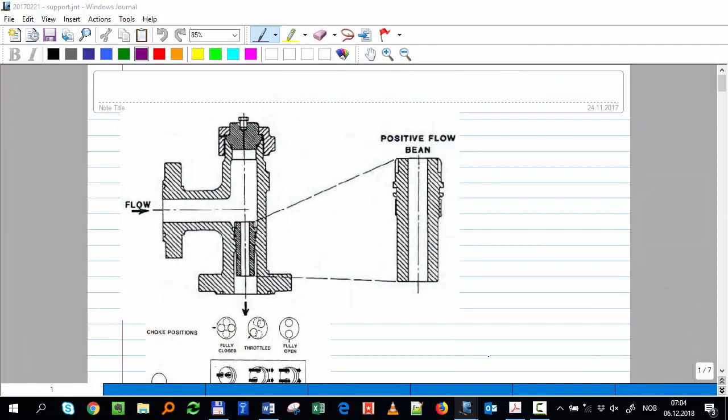Let me see, I think I have a few more. So that's a field in Russia. It's especially important for subsea systems, because there, like I said, it's very expensive to have one line separate for each well. So you commingle the production in one pipe and then that pipe goes to the surface. So that is a network - very typical for subsea systems.

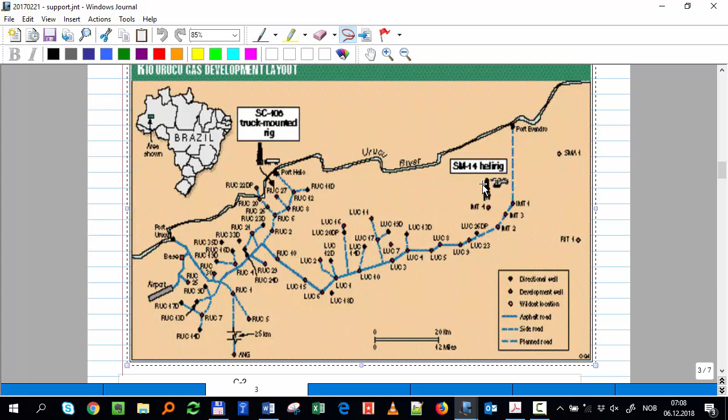Yeah, so let's see, I have one more - that's from a field in Brazil. And there the main thing is that there's some place, the export point, either here or here. And you have wells spread all over the Amazonas - they're drilled in the jungle actually. So these wells have flow lines again that transport the crude all the way to the port - I think this one. That's Urucu, another picture.

So it can be that in some cases we cannot use just a single well basis - we have to start looking at the whole system. How will the collection of wells perform? We know how to do it now for one well, or if we can assume all wells are identical, but we want to know how to do it when wells might be different.

So for that, I suggest we use a thinking experiment. We're going to use a system with just two wells. We have two wells that go to a common point, and then a long flow line that ends up on a separator. Let's call that well 1 and well 2. So to analyze that system, we're trying to use the tools we've learned before - this flow equilibrium concept. Flow equilibrium - what was the first step? You're having nightmares with the steps of flow equilibrium. You choose a point of interest. So in this case, I suggest we choose the point where everything comes together.

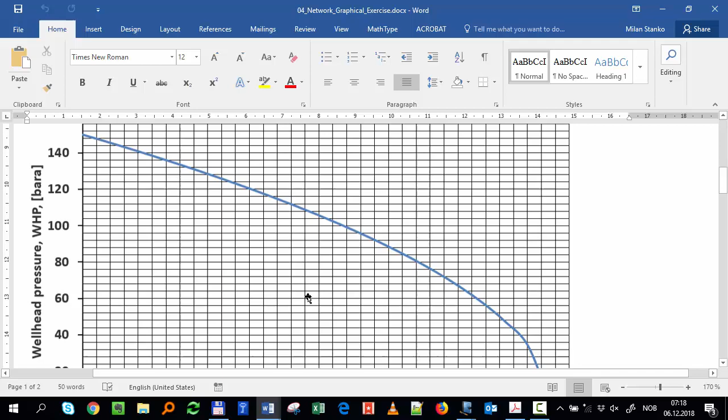Okay, so I gave it to you yesterday. It's called a network graphical exercise, and it's exactly similar to what we were doing before. You have two wells, a manifold, a pipeline, and a separator. The wellheads are very close, so I don't have any flow line here. The chokes are open, we don't care about the chokes. We got the curves for well 1, well 2, and the flow line. The task is to find equilibrium - if you put the system together, what is the equilibrium rate.

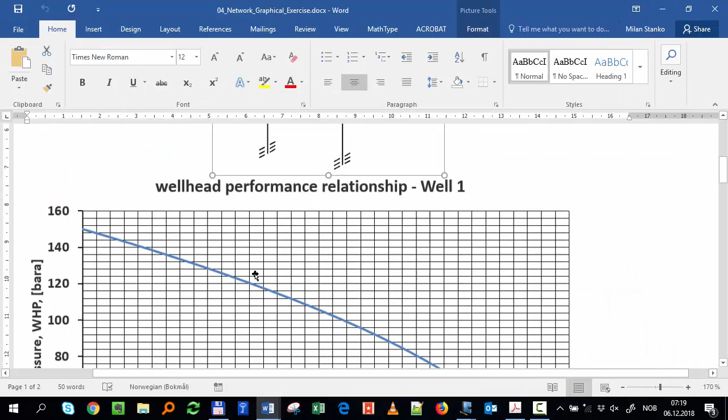So let's copy that, and you can do it on your own. I can show you how - I like to do it in PowerPoint. Let's see if you can do the same. So that is the system, and I suggest you copy this chart to PowerPoint. You can do it at the same time that I am.

So what was the first step to solve this problem? Assume pressure. What pressure do we assume? Any ideas? Let's take maybe 80, okay? Let's see if 80 is a good number.

So we go here to shapes, and we take a line, and we draw just a horizontal line on 80. I can maybe change the format, make it simply thicker, make it red first, and then make it thicker.

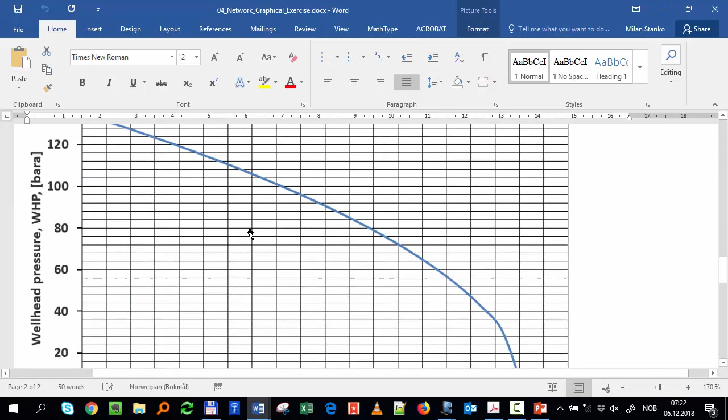Okay, now we go to the second well, then I make another PowerPoint. I want to keep the lines here. So let's go and copy this chart. Okay, I'm going to send it back.

And what pressure? The same pressure, right? The same 80 that I assumed before. So I have 80. Goes back, and then I go and knock it down. What will be the rate? I think here we go 1.1, 2, 3, 4, and 5. So it's 1.1, maybe 7. Okay, 1.17 million from that plot.

Okay, so here with PJ 80, then Q2 was 1.17 e to the 6 standard cubic meter per day. And then we go the last step. Let's call this iteration 1, okay? Because we know we have to make different iterations.

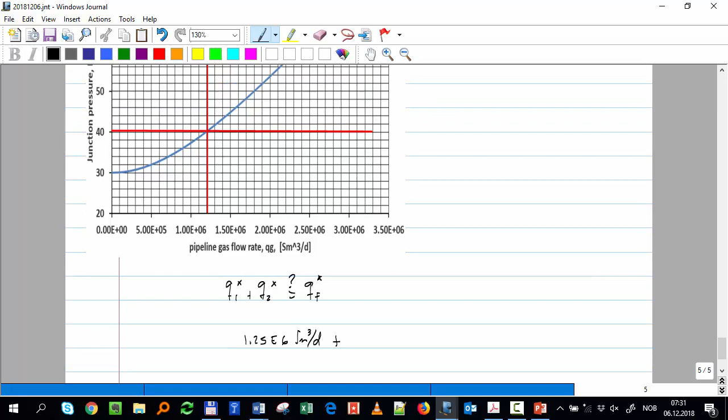Therefore, I go back and check, okay, how much was Q1 plus Q2, is it equal to QF? We have 1.25 e to the 6 plus the other number was 1.67 e to the 6. And we have on this side 1.2 e to the 6. How much is that? That doesn't work, right? We have now more on that side and less on that side.

Please note that the effect is the opposite. Here, if I lower pressure, I'm going to get more rate, okay? But on the curve of the pipeline, if I lower the pressure, I'm going to get less rate. And that's simply how it works. On this system, if I lower this pressure and make it lower and lower, the fluid can flow easily from the formation to that point. It's like lowering separator pressure. But on this system, if I lower the pressure at the inlet, then I can flow less, because I'm flowing against a constant pressure boundary.

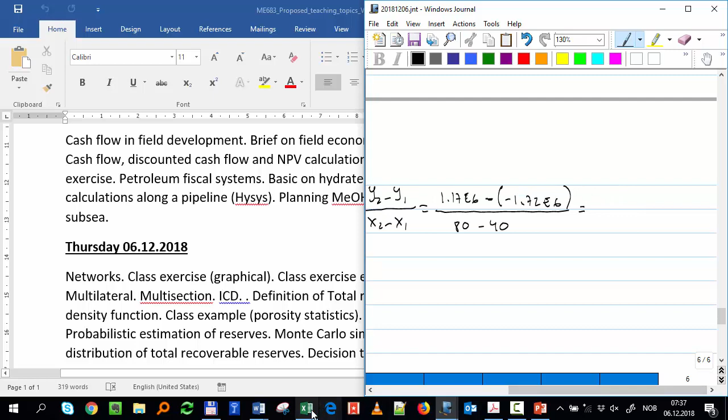You're letting me do all the work.

1.17 plus 1.72, right, divided by, we have to divide by 40. Okay, so we have 0.07225 e to the 6. Okay, that's the slope. But now we say that the slope of this new point should be the same.

If I make it from here to here, okay, I should have exactly the same slope. So I say m can also be, let's use y2, okay, y2 minus y, which will be this point here, divided by x2 minus x, that is 1.17 e to the 6 minus, what is the value of the error in this point? 0, okay? So simply we put 0, divided by x2 is 80 minus x that we don't know where it's going to be. That's the next point we're going to guess. And that will be equal to

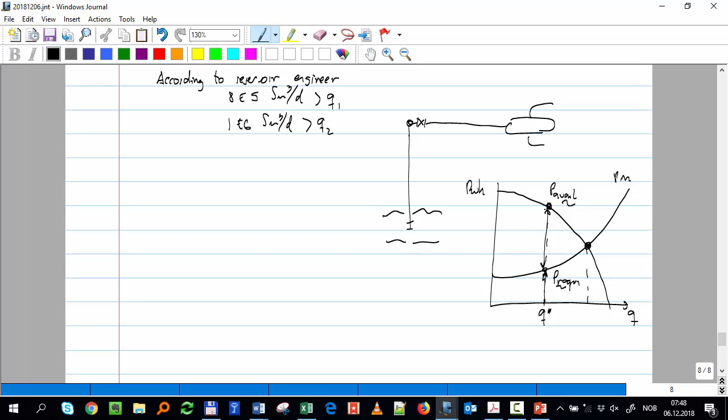But now the reservoir engineer told me I have to produce this value, this Q desired, for some reason. So what did we have to do there? We came into the available curve with that rate, we read the P available, and then we came with the Q to the required curve and read the P required. And then we say this one is greater than this one. Therefore, it is possible, and I have to put a choke in between to bring down the energy. That's what we have done, right?

So let's try to do the same here in this example. We have the curves, so we can try and calculate if the available is greater than the required. So let's go back to the rates he wants: 8 and 1 million. That's the rates the reservoir engineer wants.

So let's go back. 8 is here, for well 1. Let's extend it all the way up. That gives me a pressure of 96, I think that's 96. Or 84, 88, 92, 96. Okay, 96 bar. So let's say here P available, P wellhead. I should call it P wellhead available for well 1 is equal to 96. That's the energy I have available if the well is producing 8.

Now let's go to well 2. If I'm producing, what was the rate the engineer wanted? 1, okay, so I go here and I cross it to the left. How much is that? It's like 90, right? So I select. PWH available of 2 will be 90 bar, around 90 bar.

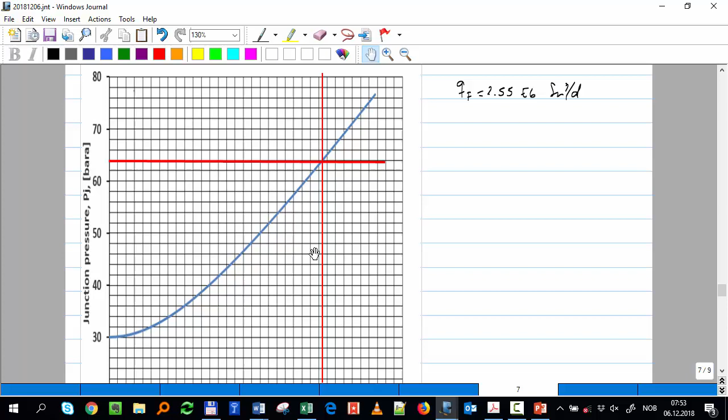You see, two different types of calculation, very different in the computational requirement. The first one, we were doing equilibrium, no choke, simply put together and see how it works. And it took a lot of time, at least 3 iterations. We had to make 2 and make a trick to approximate the solution. If the rates are below the equilibrium point, you can simply fix a rate and then calculate the choke, just 1 iteration, that's all. I think that was a question on the exam last year.

But now I want to make it, usually we have to solve it on the computer, to create a plot when we get especially big networks, we have to find a way to solve it on the computer. So let's look at how many equations we have and how many variables we have, and let's go system by system, or element by element. So let's go first on well 1. How many equations do we have for well 1?

We have the IPR, right? That was QG equals CR, PR squared minus PWF squared, to the power of n. Okay, how many unknowns do we have here? We don't know this pressure and we don't know the rate. So let's put it here: unknowns, and here we have equations. How many equations do we have? Okay, here we have 2 unknowns, 1 equation. We have to continue until these two are the same.

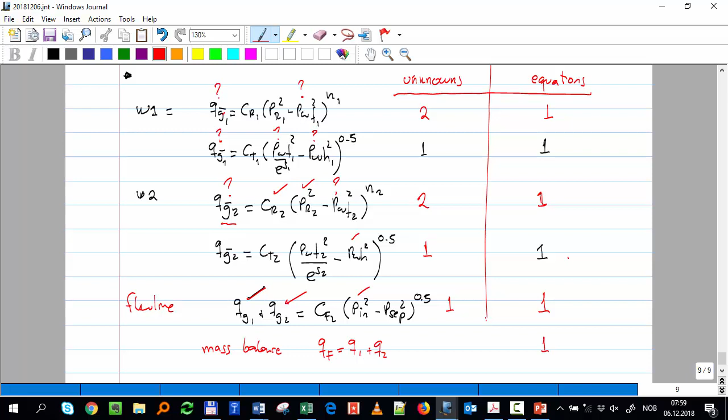What is the equation that I'm missing? What did we use in the graphical solution to close the system? The mass balance, right, at the junction. So if we make that, that's the key: mass balance. A mass balance says that QF is Q1 plus Q2. So here we have one more equation, and this is exactly QF, and we have 0 new unknowns.

Therefore, if we sum up to see if it's consistent, we have 1, 2, 3, 4, 5, 6. And no, we have one more here. 1, 2, 3, 4, 5, 6. 1, 2... we still have 7. We made a mistake someplace.

We're missing one. What equation are we missing? Oh yeah, of course, we are missing one more equation. Sorry, that's not the total number of equations. What equation are we missing here? Something very important, right? That P in is equal to P wellhead 1, and then you have that P in is equal to P wellhead 2. So here we have one more equation.

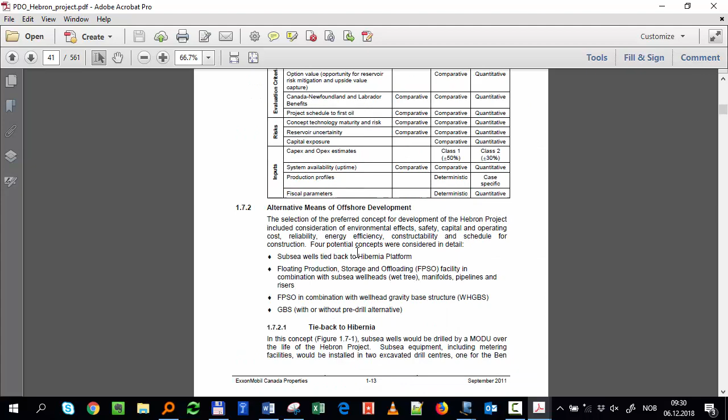So that's the overview, where is it located, what kind of block is it, how are the reservoirs located. Then you have the schedule, then how are we going to produce it. Is it this approach or this approach? What kind of approaches were considered, and how we see which approach is better. They have different criteria: economic, technical, environmental. Then they explain a bit how and where they're going to put the things. We're going to talk about that tomorrow. The subsea system.

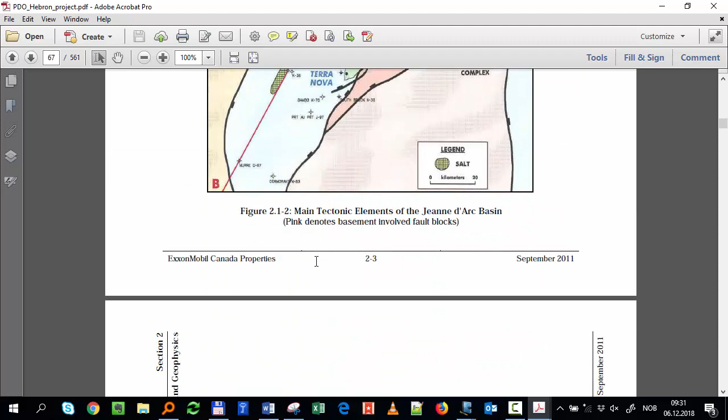Then comes, you see they even have different font types. That part was done by the geologist and that was done by someone else, and they forgot to put the same font, so someone got fired. But okay, so they explain about how the reservoir was formed, the geological structure, which we don't talk too much about in this course. Then that's when it was generated, all the oil and the gas, from which year, 150 million years ago it started generating, and then most of the oil was generated at that time. That's geology, poetry.

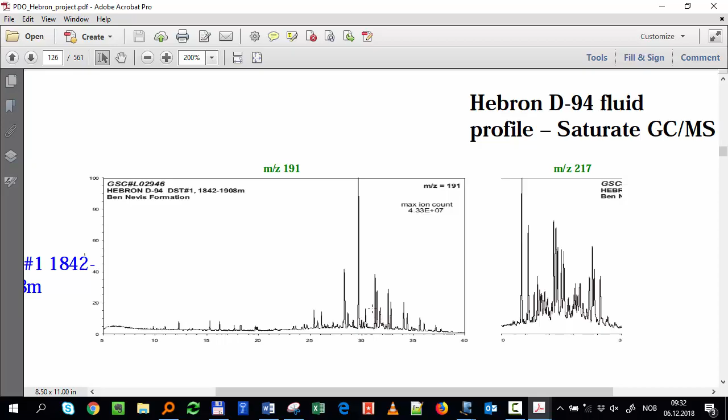Then we come to something more interesting, taking some cores to see how they are, and we're just at page 100. I'm going to go forward a bit quicker. That's the hydrocarbon, what kind of hydrocarbons you have. That's a gas chromatograph, showing the carbon number. The gas chromatograph tells you the carbon number and the amount of how many components you have. Here you see some peaks, C30, and here some more peaks, C10, C15, that's our oil samples probably.

Then come the people with seismic, they try to find out - you remember I told you, or maybe I didn't - in exploration, they send... I think I have some pictures here.

Okay, I think they are here. No, they're not here. Okay, they are for sure here. Okay, that's the phase that we call pre-exploration. No, it's here.

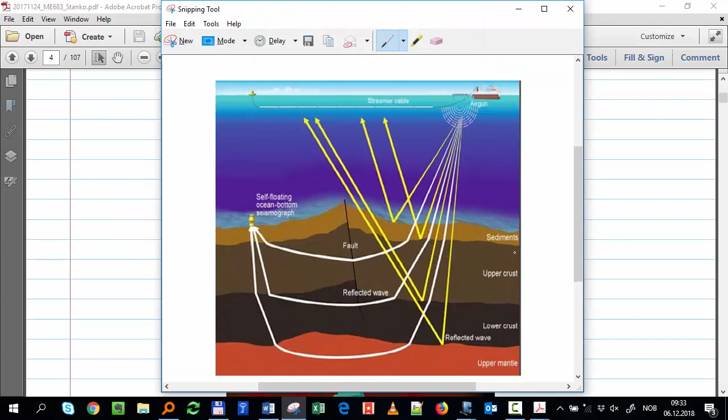Okay, but I don't think we discussed that part yet. That was going to be maybe tomorrow. Okay, but that's in exploration, exploration seismic. They use it offshore. Here we're talking about offshore.

Okay, the basic idea is that you send a wave down. You make a wave, and that's typically with an explosion. Here we call it an air gun. You send the wave down. The wave travels very fast, and then it will start to reflect where you have a change of properties.

So here in the sea, everything is more or less uniform, but here you have a change and it will reflect, okay? That's the first one that reflects, that comes up. Then you have entering to another layer with different properties. It reflects, and then you get a different reflection here.

So on this cable, what you have are like microphones, okay? They are called hydrophones. They pick up the signals of the reflection, and they try to make some sort of a map of what you have below the surface. That map, the whole story was to show you that's exactly what you have here in this Hebron PDO, okay? Trying to map the different things.

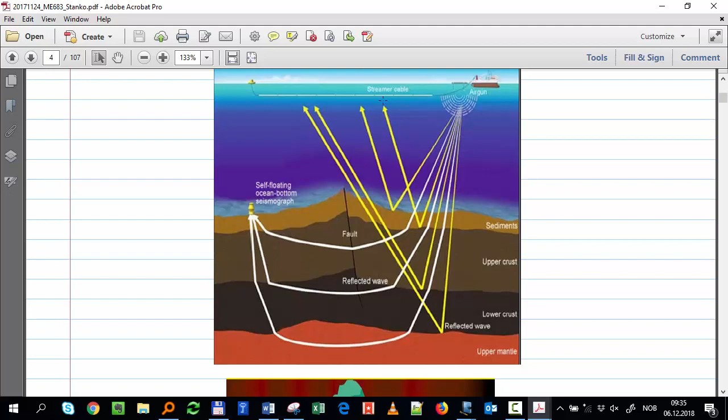And this requires a lot of power, okay? Computing power, because this boat is just flowing, going in one direction to map a lot of things. So you have to process the image and try to make the map very quickly, process the data, okay? And then you end up with something like that. From there you try to see where are the layers, where are the faults, and where I might have hydrocarbons. That's the job of the geophysicist.

Okay, let me copy that so you have it in the notes. So after you do that, you do a lot of processing, a lot of sweating, then you end up with this image. And from the image, you try to find the volumes, you try to find where you might have something, where do you want to drill, all kind of things.

It's very useful. You try to get like an X-ray of the formation, from here to here. It's not so simple. You have to do a lot of things, a lot of assumptions, but that's what we try to make. So that's the job of the geophysicist.

Okay, we can also do it on land. Let me see, on land there is a nice figure here. You do exactly the same. You have a place where you create an explosion, and then you put a lot of microphones that you deploy, and then they are measuring the reflection.

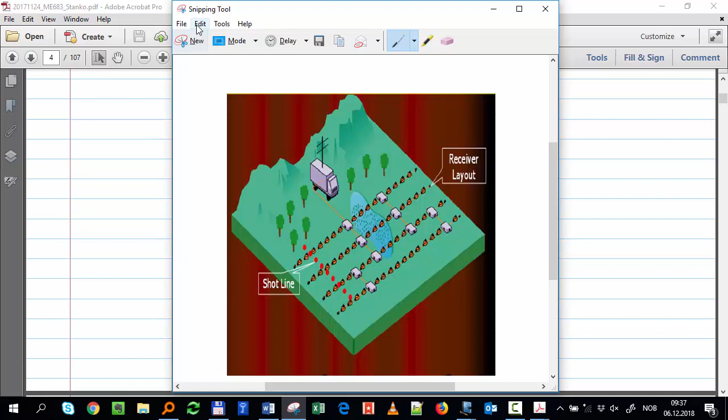Okay, you don't have the water layer and you cannot do it, so you have to go deploy all of this setup and then measure for a time, then take it out, put it in another place, and do the same. So it's more time consuming. That's when you do it on land, land-based seismic.

Okay, but let's go back to the PDO. Let's maybe rotate back. I think we have to rotate like that. Okay, that's the different structure where you are.

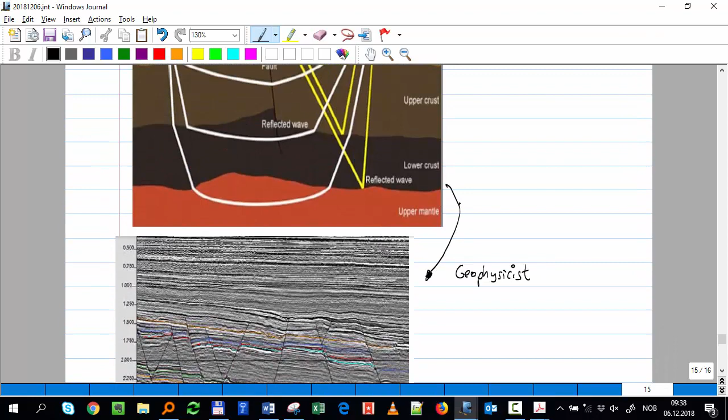Time to depth. Here, this conversion, what they're saying here is exactly time to depth. They get some time when the wave is reflected, and then from there they have to convert when that reflection is happening. So for that they have to make an assumption of the velocity of the wave, how quick is the wave traveling. Depending on the layer, they will travel at different velocities, and they will reflect, you will get the reflection at different times.

Again the same thing, discussing that there are all kind of things. Then you try to map the properties. Hydrocarbon pore volume, we are going to see now what it is. They try to get porosity. Finally we have references, comes petrophysics.

And we are going to talk about that also later today, just now in a second. We're going to try to make that distribution, okay? But basically, we have here two things. When we make exploration drilling, let's make it, maybe take it right away, okay? Exploration drilling.

Okay, we do two things. We drill our well in the formation, and we can do two types of analysis. One of them, well, we can make many, but one of them is, instead of drilling with a normal drilling bit, we drill with a bit that has a container. We drill and then we take a core, a piece of formation that looks like that, and we retrieve it and analyze it on the surface.

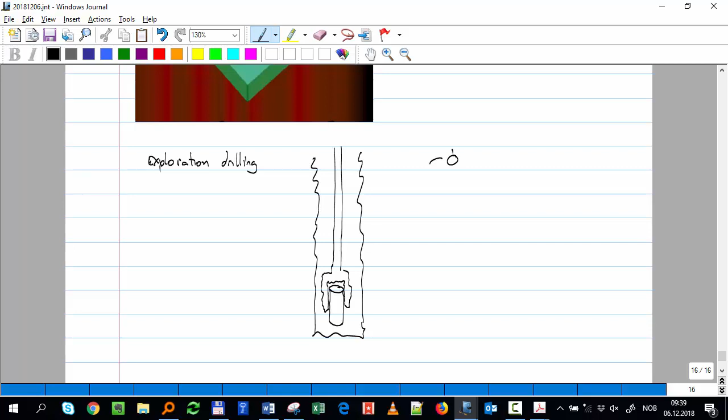And that's going to give us a lot of information about, for example, porosity, about the fluids, about the saturations. It's going to give us information about permeability.

I think that's what they are doing here, because they say porosity and the samples, using 2,287 core samples from 6 core wells. So they have 6 wells, and they make 2,287 core samples. This is called coring.

And this is what I have here. This thing is a core sample. They took all of them and they measured and obtained - that's exactly the exercise we're going to do here in class. They found what was the porosity of all of these samples.

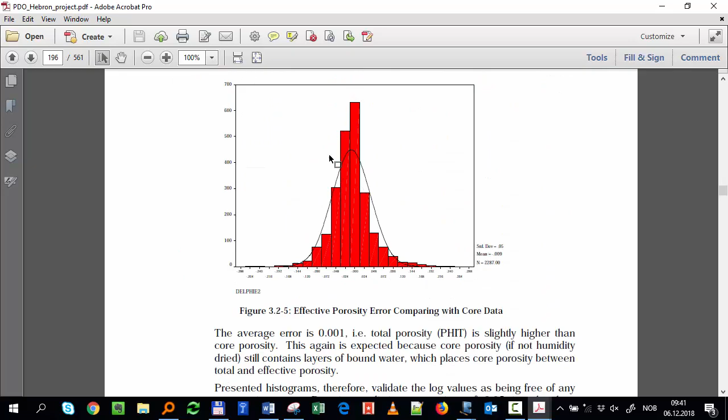And this is a probability distribution chart. We're going to see how that looks like.

Another thing that petrophysics does, the petrophysicist does, is they send tools on the hole that emit some kind of signal. They have different types of instruments, and that's to measure, for example, if we have different layers - typically we have different layers - so they pull out the rig, or they can do it while drilling also, and then they send a cable with that instrument, and they start measuring.

And you have different layers with different things, so they can first detect what kind of layers you have - if it's something that can have hydrocarbons, or is something that simply is a seal layer. It can also tell you something about if it has water or not, about the water saturation, and detecting hydrocarbon bearing rock. But it can also tell you about water saturation, and also where is the contact - you can see, for example, the oil gas contact.

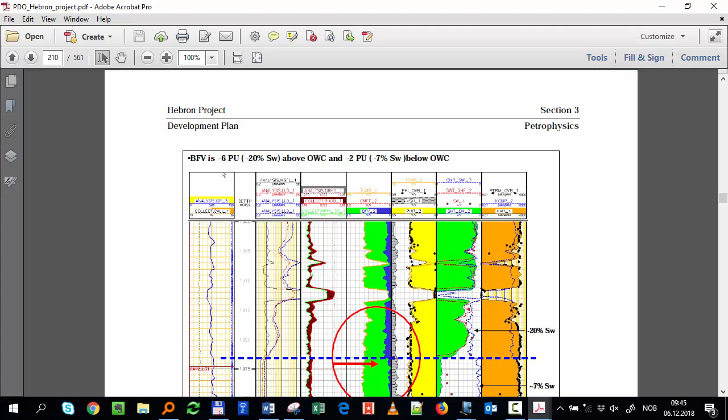You see they detect something there, some change. Those are the cores - they collect some pictures of the cores. Here you see fluid contacts, and then they try to determine where is the field oil line, and the depth - that's oil - and then you have the water line. So they say the contact is more or less here.

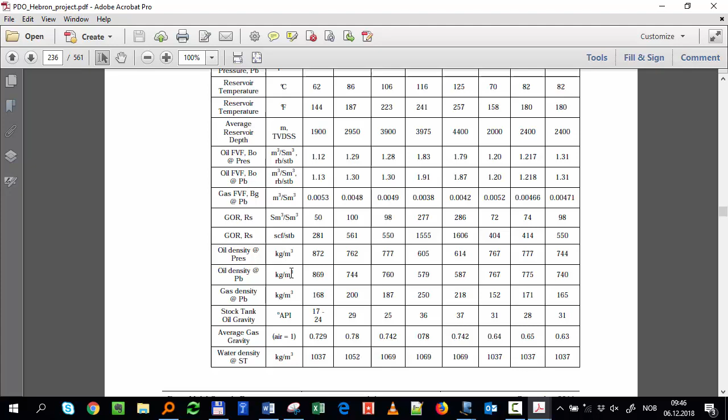Okay, and then they made the porosity, try to get once more from the permeability. Okay, I think that should be okay. Now we come to the reservoir, and that's what we are going to talk about just now. Reservoir, the first part. Here they say, well, all the structures you have, but one of the most important parts is the composition, the type of fluid you have in the formation. One of the most important things here is again properties, properties.

It should be coming soon. That's permeability from the petrophysics. I should be getting close.

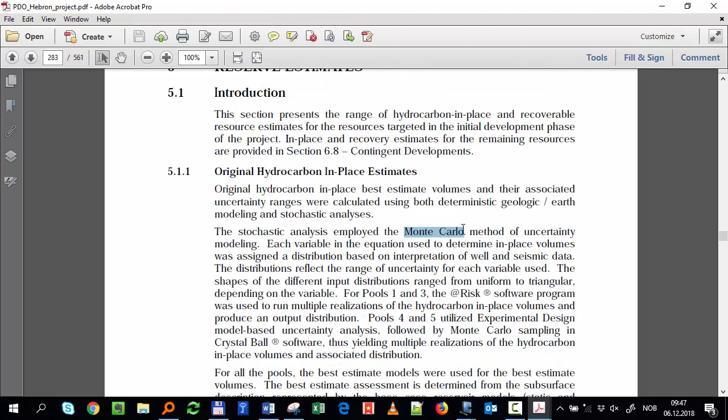Reserve estimates, okay? A big chunk of what we have to do from D G0 all the way. We have to calculate the original oil in place, and we have to calculate also the total recoverable reserves. And we are going to use exactly the same method they are using, but of course we are going to use a much simpler reservoir.

Here they have a very complicated case, if you remember the figure they had before. That's what we have done yesterday. They have the IPR curve, the tubing performance for different cases, so they propose a well, and then they calculate the rates.

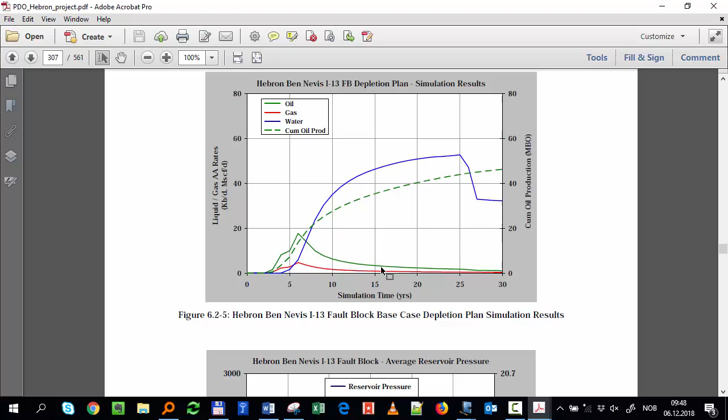That's oil, that's what they get with oil. That's exactly what we have done, I don't think it was yesterday, where we calculate the production profile. So they are getting this profile of oil. That's exactly what we have done yesterday. But now, just to show you, it was here, I think, all the way to the top.

Okay, they have a very complicated case. We're going to make it for a simplistic case, but we are going to use the same method that they use. Okay, so let's take a case.

So for that, first I need - let me say, it doesn't have to be a square, but let's say that it's something like that. It's a block that I have. This one has a certain volume, the volume of the rock. If it's squared, this one will simply be A times B times C. If it's like a disk, then it will be pi D squared times 0.25 times H. And you can have all kinds of complicated shapes. That number you get from the geologist and the geophysicist.

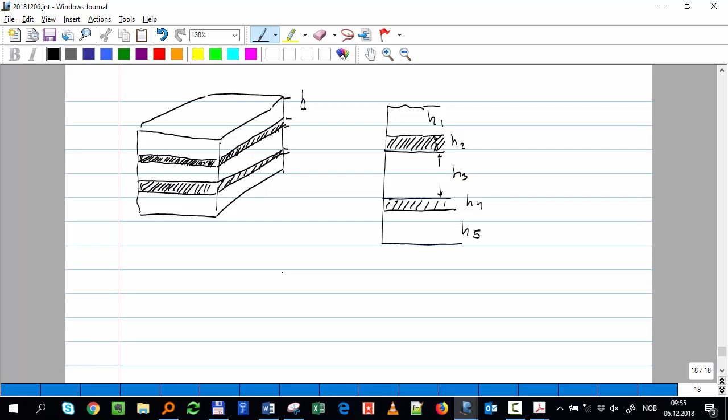So he defines a new parameter called net to gross, that represents how much of the vertical height is actually filled by hydrocarbon - hydrocarbon bearing rock. The way he defines it: H1 plus H3 plus H5 divided by the total. How much is filled with hydrocarbon divided by the total.

We know it's going to be dirty, not pure, it has some things there in between, so I try to define that number. Therefore I multiply by this net to gross, net to G, to modify that volume that I had of my rock.

So we have the volume of the oil exactly at those conditions of reservoir pressure and temperature, down there. Now, what happens when I bring that oil to the surface? If I have that oil, let's say a cube of oil - we usually use the color green for oil - at PR and TR, and we bring it, when we produce it, to standard conditions, P standard and T standard. I bring it with a tanker to the market. What's going to happen with that oil?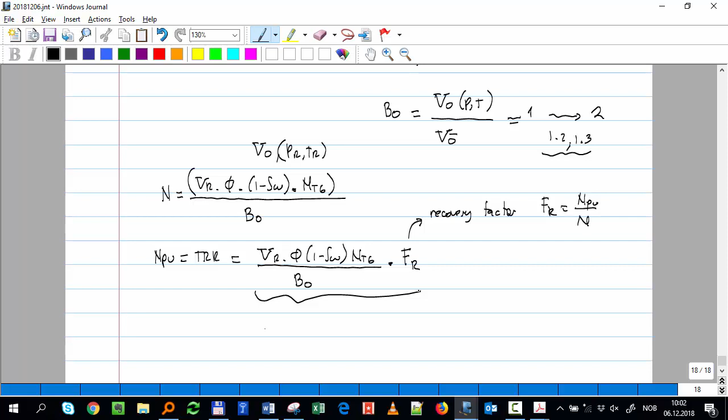So if you put it in a graphical way, you can say that I have here, let's call it in the center, reserve estimation, where this NPU will be equal to volume of the rock times phi, 1 minus saturation, times net to gross, times FR divided by BO. Okay, that's that equation. And the inputs it's using are VR, then porosity phi, then SW, then net to gross, and then FR, and at the end it's going to give you NPU. Okay, that's the process, that's the equation. You can have something more complicated, using a program or having a more complicated geometry or having a sum of different things. For our case, we put it very simple. It's just that equation, okay?

If we make that equation, we can find out NPU, and that can give the company an idea comparing with other projects to see if it's worth investing or not. If they have the same size as another project that was very profitable, so they say yes, let's go for it.

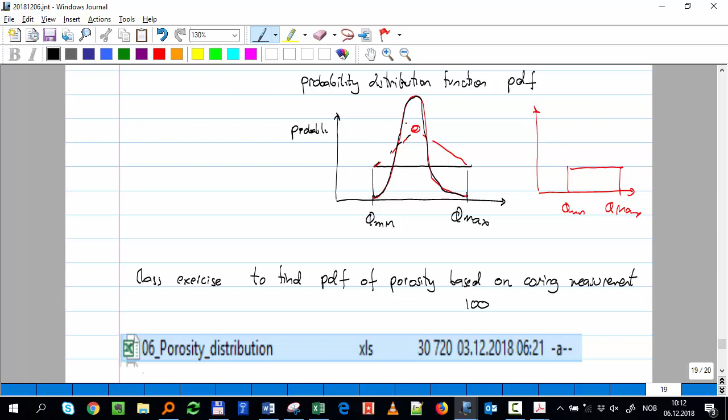Now, the next step that we're going to make, we're going to put some porosity values. We're going to put here the minimum, and one will be the maximum, but I'm going to put some points in between. Ideally, like I showed you, this curve will be continuous. In real life, I just have a discrete number of measurements. I don't have a continuous curve. I have a discrete number of measurements.

So I'm going to put here phi 1, 2 in between, 3, 4, let's maybe use 10 of them. Because you're going to see now, so to calculate, let's say, this one will be the minimum, the maximum minus the minimum divided by the number of points plus 1, plus the previous.

If I want to have between these two, the phi minimum and the phi maximum, 10 numbers, I want to have 1 all the way to 10. How do I calculate that? I think you can say that this spacing will be phi max minus phi minimum divided by 11, right? Is that correct? Think so? And then what I say to find this guy, is this spacing plus this number, and so forth. Yes.

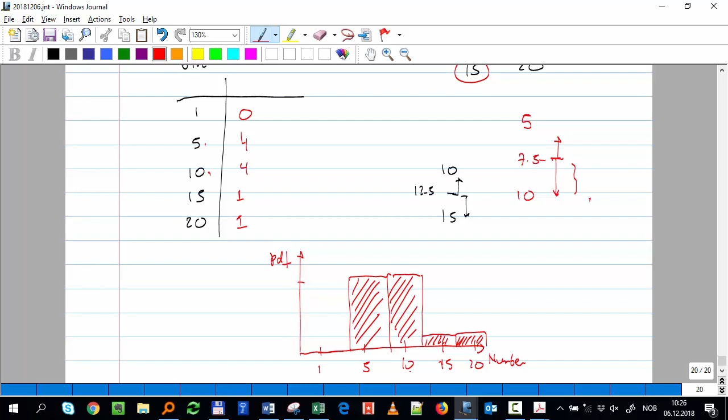So if I was to say what numbers do I use, I'll use 5 and 10, because they come up the most. So we're trying to do something like that with porosity - we're trying to see which porosity occurs most often. That's why we made the bins.

Now we have to count how many of these fall where. For example, this one goes in the maximum - here I should have 1. This one, 250, where does it go? Maybe here, so I put 1. 321, where does it come? Here, I have 1. Now 232, probably here.

Now this is a manual process. Remember what we always say about manual processes - computers can do it, not us. It's not that we are important people, but we want to do other things. So let's use a computer to count that.

For that we're going to use a function called FREQUENCY. Be careful, this function is very special. Let's put here 'number of occurrences' - how many times it happens, that value. How many times do I have 182.2 and so forth?

I have to select the whole column to the right, all of it, and be very careful - you have to do this extremely carefully. Now click equal to - you should still have the square around it - type FREQUENCY, and you can now open the function. Actually, don't open the function, just leave it like that.

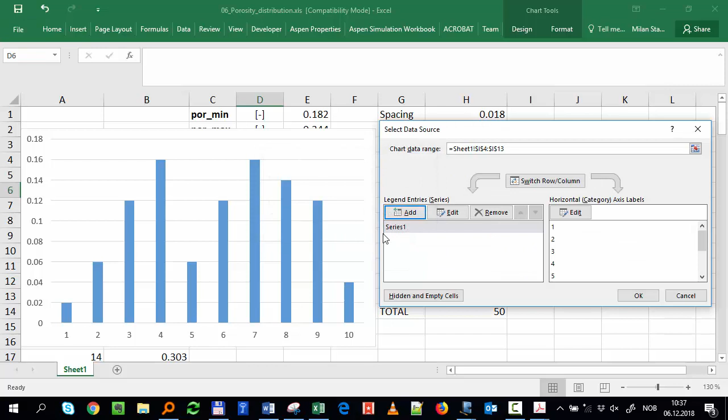Select data. We have to select the name, the porosity, and the values we have to select the fraction, I think. Yeah, sorry, the name, don't put anything on the name, just leave it empty. And the values, you select the PDF. And then on the label, you select here the porosity.

I'm going to move the chart. Just the PDF. We have to change this format. I want to put the tick marks, outer tick marks. And also I want to increase the size, maybe to 16 or 18. Then the last thing I want to make is to make it like that.

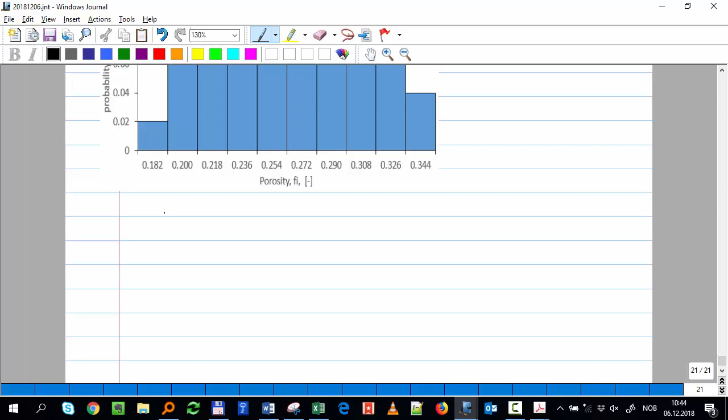Okay, now there is one more concept I want to talk about, and that's the cumulative distribution function, the CDF. Our petrophysicists made these measurements, and we found that distribution, and we say, if you want to calculate, you want to use a porosity, remember, the goal is to use it to calculate this equation, this porosity. So it's saying if you're going to use any porosity for that, it should be around those numbers, which are the most likely.

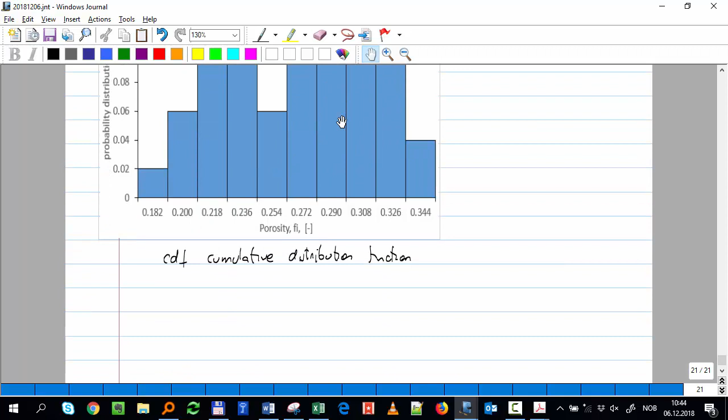Now I want to show also another way, another thing called cumulative distribution function. And that's useful for another reason, we are going to see that's what we use actually for reserves. For reserves, we don't use this plot, it's a bit more difficult to read. We use the CDF, and I'm going to explain what it means. So on the data you calculate CDF, let's create one more column called CDF, cumulative distribution function.

Initially, it will simply be the number to the left, 0.02. The second one will be the previous plus the one to the left, and so forth. I can just drag that down all the way until I find one.

Now let's make a plot. This one will be simpler. We want to plot the CDF versus the porosity, but we can plot it simply by using this scatter plot. Let's use that graph.

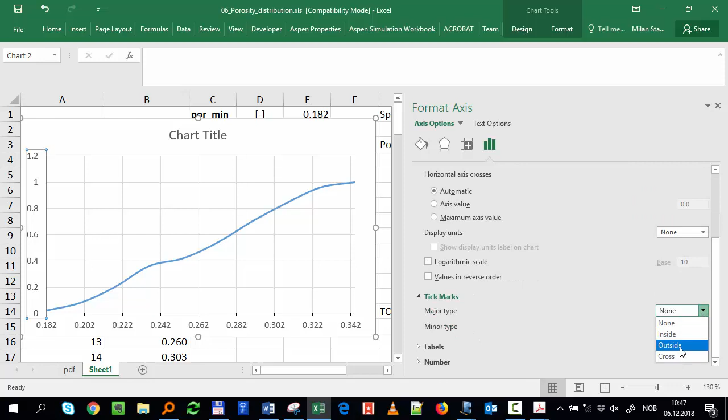It's not so important that you later spend time on how to make the graph nice, but I think if you know how to make the calculation, that's more important. So don't be stressed if you don't manage to make the plot. The plot is a nice way to visualize the information, but what we want is the calculation. So that will be called the CDF.

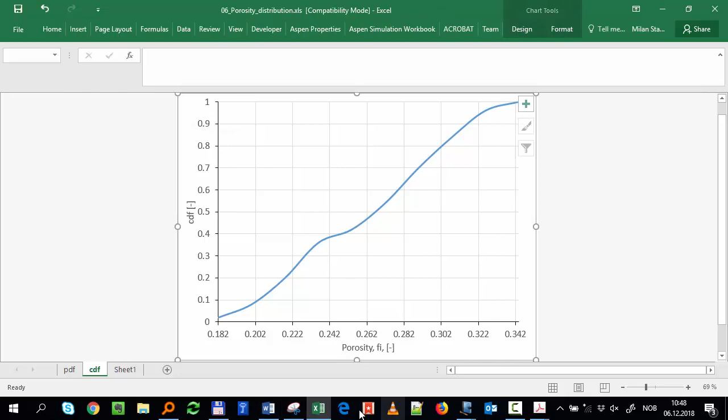I obtained this plot that is called the CDF, and we're going to see now what it means. Here it means I have a probability of 10% that my porosity values will be 0.202 or lower.

And here, for example, I have 50% that my porosity values will be, maybe 0.27 and lower. 50% of my samples have a porosity value equal to 0.27 or lower. 80% of my samples have a porosity value equal to 0.3 or lower.

And we are going to see why this is important, because this is something that we use very much for TRR. We're going to see later why.

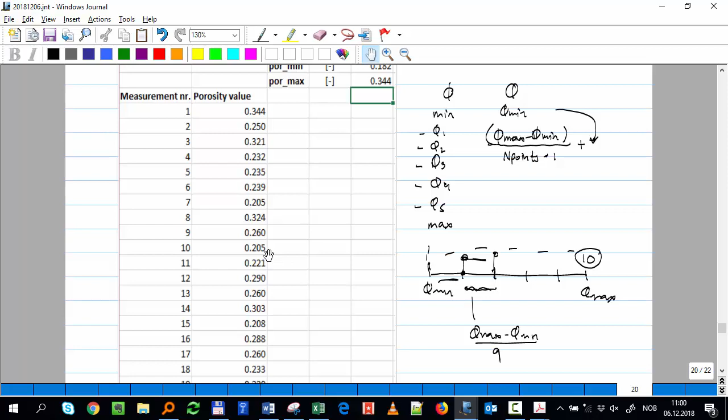First, we have to calculate the distribution of each parameter. If I have information, I take the numbers, I make a frequency analysis, and then I calculate these two. If I don't have anything, I have to start making stuff up. One approach is that I say, well, I have a minimum and a maximum, but I assume all of them have the same.

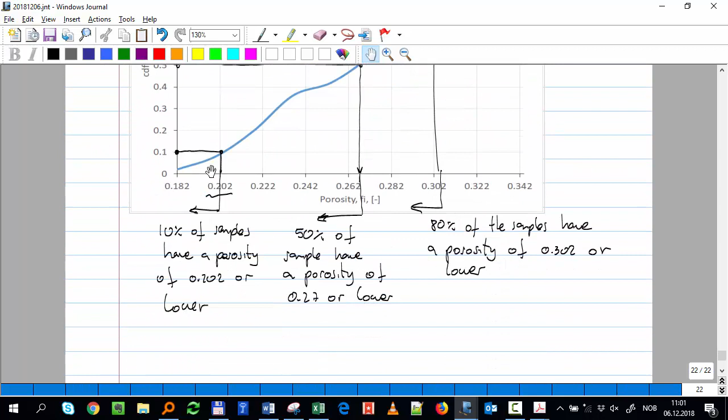When you gain more and more information, you're going to get more information about the distribution of that volume, you're going to narrow it down. So I'm saying that this cumulative is important. You say here 10% of the samples will be below that porosity, 50% will have below that porosity, and so forth. That's the way actually the reserves are plotted. TRR are plotted using a CDF, but the CDF is made the opposite way, and you will see now why.

We have here in the x-axis the TRR, where you have a maximum and a minimum. But the curve is plotted like this. Actually, the plot is going like that. And here you have 1 and here you have 0.

So if you take a fraction here, for example, let's say 10%, that number here typically we call it P10, and you will see that number reported many places when you read a reserve estimation report. That means there is a 10% probability that reserves will be equal or higher than that number, P10.

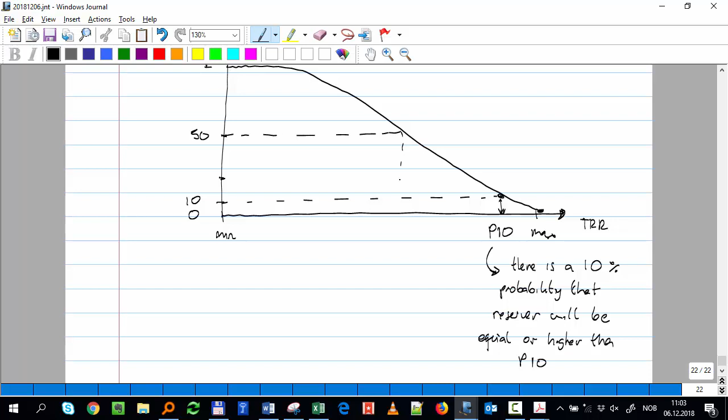So that's something very risky. If you make your planning based on that number, you only have a very small probability that your reserves will have that number or higher. Then you have some other number that is used, which is 50. And again you have here P50.

Okay, and here you have there is a 50% probability that the reserves will be equal or higher than P50.

And then finally you have P90. That's very conservative, and that's what many countries are using. P90 - you say there is a 90% probability that reserves are equal or higher than P90.

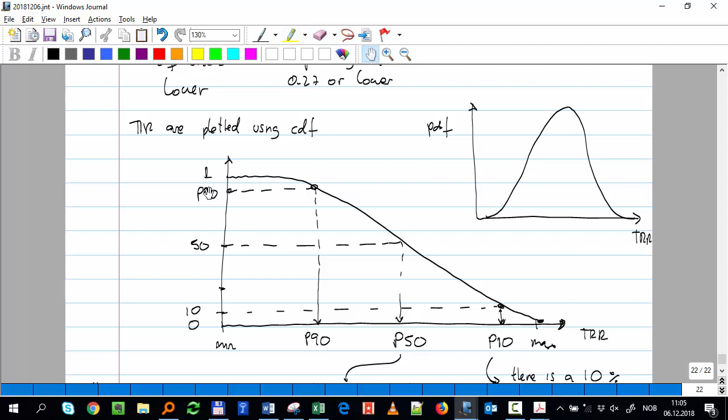Okay, so these are the three numbers. Usually you have a distribution, and the PDF of the TRR, we are going to see now how to calculate, but it's also going to look something like that. But actually we don't use the PDF, we use the cumulative, because we want to be sure that we have at least that number or higher. That's the way the industry works.

P90 is the number that you most typically use. You want to have a 90% certainty, but some people use any number between 90 or 95 - some people use 95, they want to be really, really sure - all the way to 66%, or 55 to 66. That depends on the company, on what happened here.

Now how do we compute this? We know, so you got some intuition, right? The intuition is that if you have here a process, that is reserve estimation, that is that formula: N = phi * V_R * (1-SW) * net to gross * FRU, divided by BO, right? And you have different inputs: phi, you have saturation, you have volume of the rock, you have net to gross, and you have FRU, and you have BO.

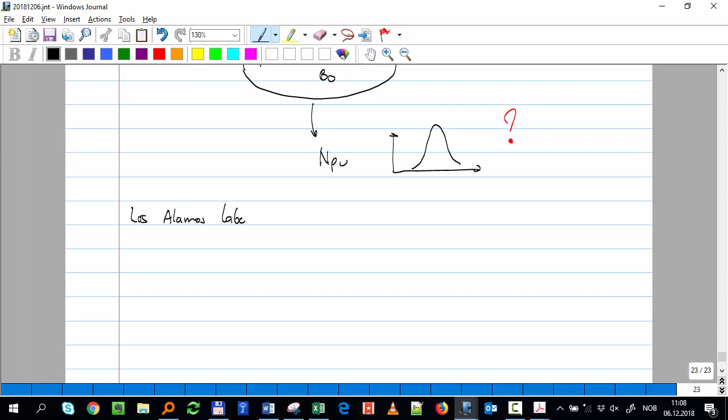But now how do we calculate this thing, based on all of that input? Not so long ago, in the 40s, there were two clever guys working on the development of the atomic bomb, from Los Alamos laboratory, that came with a method that's what we use in the petroleum industry to calculate reserves. These two guys, Metropolis and Ulam, are the ones that have the credit of inventing this method that is called Monte Carlo, exactly to calculate this thing.

Monte Carlo - they say one of them, I think it was Ulam, liked to go to the casino to do betting, so he was trying to use the method for that, and that's why they call it Monte Carlo.

The idea is very simple. The first step is to assume a random number for each parameter. And of course, the random number has to be inside the distribution.

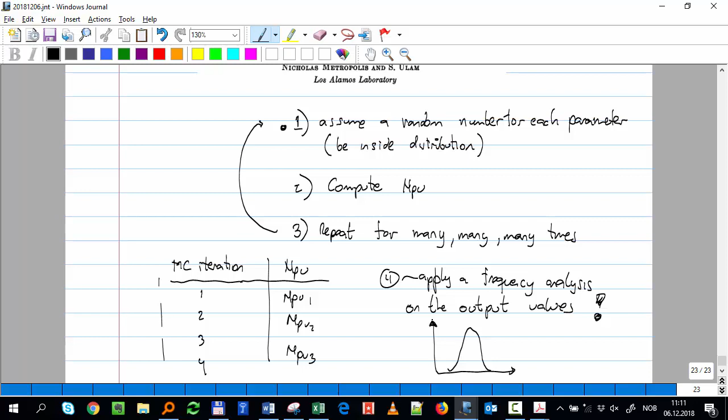So that's what we're going to do now to calculate reserves. Basically you take a random number, introduce it here, calculate N, repeat with another random number, calculate an N, and so forth. This is known as a sampling method - Monte Carlo is a sampling method, and the idea is to find a representative sample of the whole population.

Okay, we know if we change these numbers here, we can have infinite combinations. Here you have maybe 10,000 values on each point, that gives you too much. 10,000, to the power of how many you have here? 1, 2, 3, 4, 5, 6. To the power of 6. You'll have to run calculations your whole life.

So Monte Carlo says, well, you don't have to make so much. Just make a few iterations, and then you find a representative sample of the whole population.

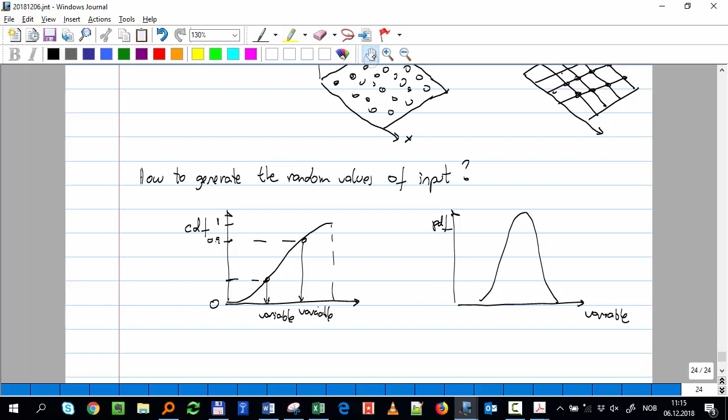Another random number between 0 and 1, 0.9, and you find your new random variable. So you're going to do exactly that, to make the sampling or generating the random value using the CDF.

And to make our life easy, we're going to use for our input only a kind of uniform distribution. That means that every variable, porosity, etc., will have simply a uniform distribution like that, phi minimum, phi maximum, and PDF. And the CDF, therefore, is going to look like this. Phi minimum and phi maximum.

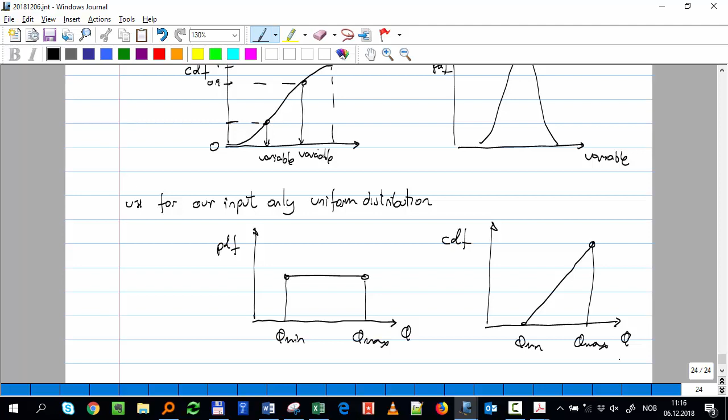Therefore, phi will be the phi minimum plus a random number between 0 and 1, times phi maximum minus phi minimum. So that's the equation we're going to use now in our Excel expression, assuming completely uniform - we're taking a number here and finding a number there. There are other more complicated functions like a triangle, or like normal distribution. To keep our life simple, let's make it uniform.

So let's now go to the exercise, the last exercise we're going to do today. That's exercise 7, probabilistic estimation of reserves, Monte Carlo.

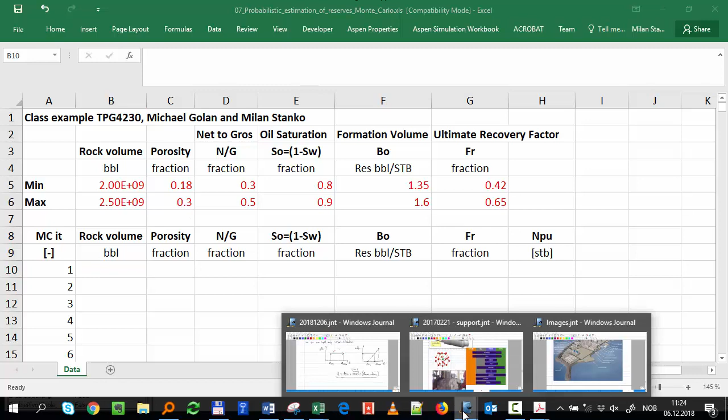We have to generate a random number here. How do we do it? We already explained before, right? Minimum plus a random times a maximum minus the minimum.

So let's do that. This will be, rock volume will be the minimum plus a random number. For Excel to generate a random number, I use the function RAND. You see the description: returns a random number greater than or equal to 0 and less than 1, evenly distributed. Sorry, here we forgot we have to block B5, because we have to block it, otherwise it will change. Random, I have to open and close parentheses. That function doesn't take any input, but it's still a function, so you have to open and close parentheses.

Times phi maximum, this guy, block it, minus the minimum, unblock it, and close parentheses.

Now don't press enter yet. I'm going to show you a trick. If you do it like that, you'll have to do it for every of the other parameters. But if we drag this cell to the right, it will be very helpful if these ones would also move to the right, right?

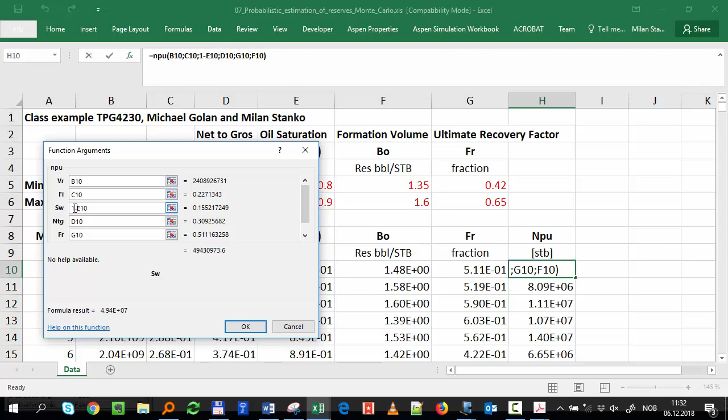Oh yeah, that's correct. Yeah, so we should put 1 minus that, okay? So that's an error, we should put here 1 minus saturation. Very good that you noticed.

Okay, what is the next step? The next step is frequency analysis on Npu, okay, that's the next step I have to take. Make a frequency analysis on the output.

For that I have to copy this column. You have to be careful here, okay? Every time I make a change, you see that the random numbers are changing. Every time I click, every place is changing the random number, so that takes a lot of memory from the computer. So I suggest when we do the frequency analysis to keep this file closed.

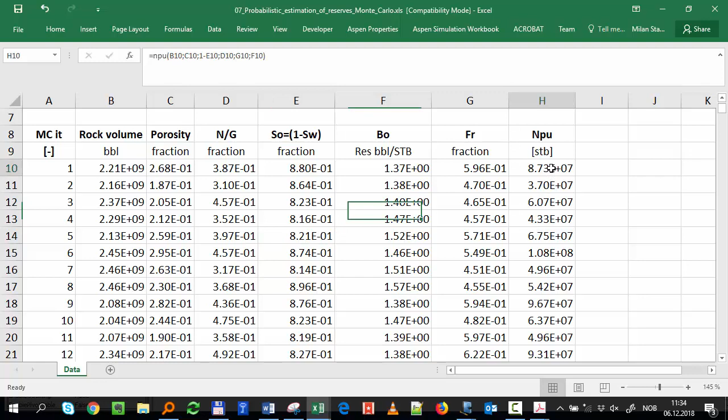So let's just select this column, copy, and then we open an empty Excel file and we paste it there. We say Npu and we paste only the values, paste special, copy, and paste special only the values.

And I close this file, I don't need it anymore because it will keep changing the random numbers, and that's making my computer heavy, difficult to use. So I simply close this file, and then I'm going to use these numbers. Npu, that's in standard barrels, and these numbers should be in scientific notation.

To make the frequency analysis, what is the next step? Find the maximum and the minimum, right? Minimum and maximum, that will be in standard barrels. The minimum, same thing here, we're doing exactly what we've done before. And the maximum. So the minimum is 30 million and the maximum is 128 million.

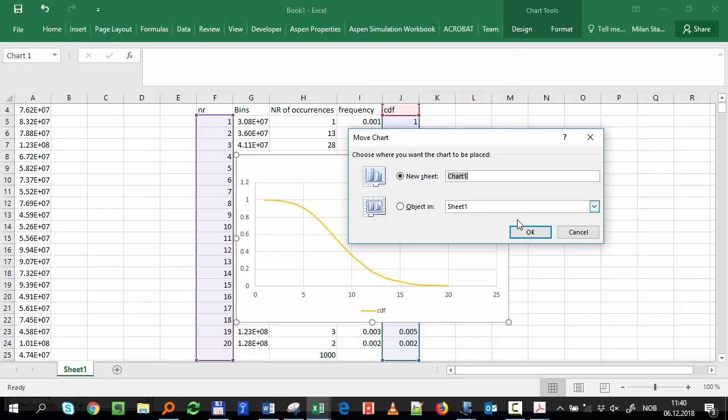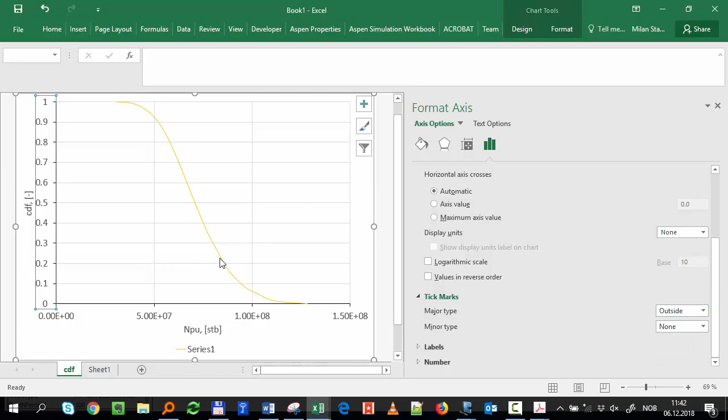Okay, here we already have our expression. Let me put that in a new sheet as a CDF. Here it should be the bin, so it should be G. Okay, so we got this, but we have now to plot from the minimum to the maximum, 30 to 128.

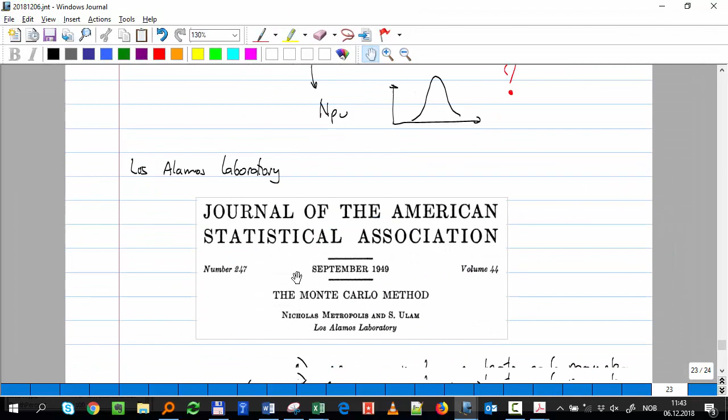And that's how the cumulative distribution looks like. And let's copy also the data so you have it. That I don't need anymore.

Okay, so that's how it looks like. You see, it looks very normal, a normal distribution, a standard distribution. And as homework, you have to do it yourselves, but you should get similar numbers. You won't get exactly the same because your random numbers are different, but you should get similar numbers. Okay, so that's a PDF. We don't use it much for reserves, it's just nice to have.

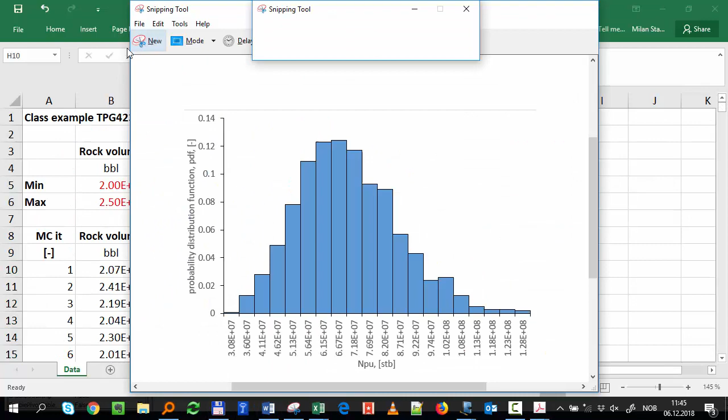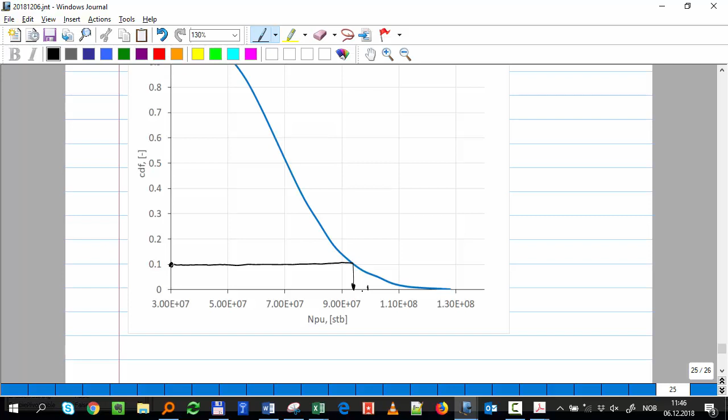Okay, now let's see the results. What are the three numbers we have to report? If you remember before, P10 - how much is P10? We go here, and these numbers, you should obtain similar numbers to what I'm getting, not exactly the same but very similar. 10%, then I knock it down, how much is that? Like this is 100, so it will be like 95. So P10 is 95 million standard barrels. That means there is a 10% chance that my reserves are 95 million barrels or above. This is very risky, it's only 10% chance - there is a chance, but there is only 10%.

P50, okay? P50 is 70 e to the 6. There is 50% probability that my reserves will have at least 70 million barrels or bigger.

And P90, how much is that? Like 60, this is 60, that's 55, 52 point - P90 is 52.52 million. So those are the three numbers. If you see on the Hebron PDO, they should have some distribution like that someplace in the reserve estimation.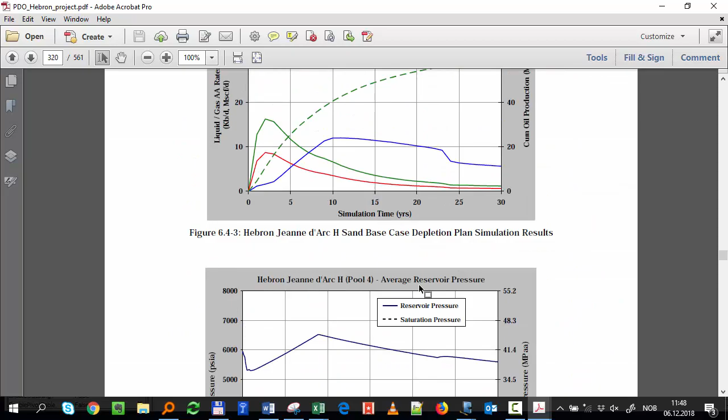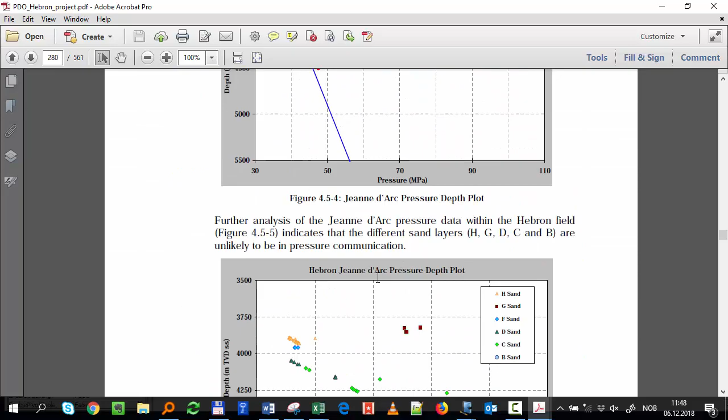That's the forecast. Let's see if we find it. Let's see which page it was - reserve estimation, reservoir overview, reserve estimates, 5.1. So let's find that page, 5.1. I'm going to give you this document tomorrow, so you can have it as a reference and see what kind of activities are made when you develop the field. Where was it? 5.1, reserve estimates.

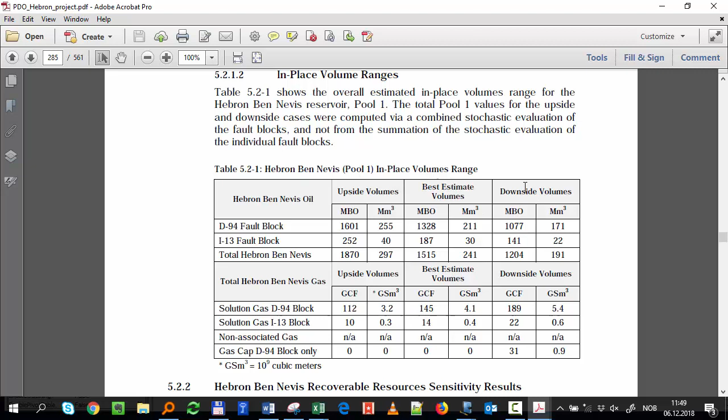Okay, they call it upside, best estimate, and downside volumes. That's the initial volume in place, that means that's N, and instead of calling it P10, P90, P50, they call it best estimate, upside, and downside. That's P90, that's P50, and that's P10. So let's call that, but they have to do it for different regions because they have a bunch of other regions. And they have to do it also for the gas cap. But we have obtained something similar - that's, let's call it here, from Hebron PDO.

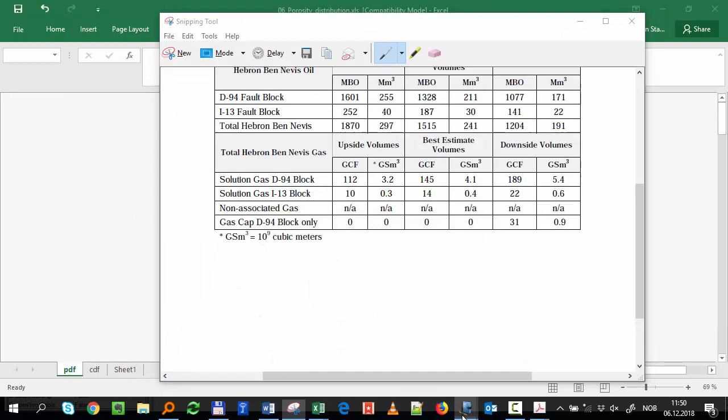Okay, and let's see if they have the distribution. Yeah, they don't, I don't think they give the distribution. They just give the three values, P90, P50, and P10. Let's write it here. Upside, that is something similar to P10 - be aware they might be using a different number, like 12, might be using something slightly different. P50, and that is P90.

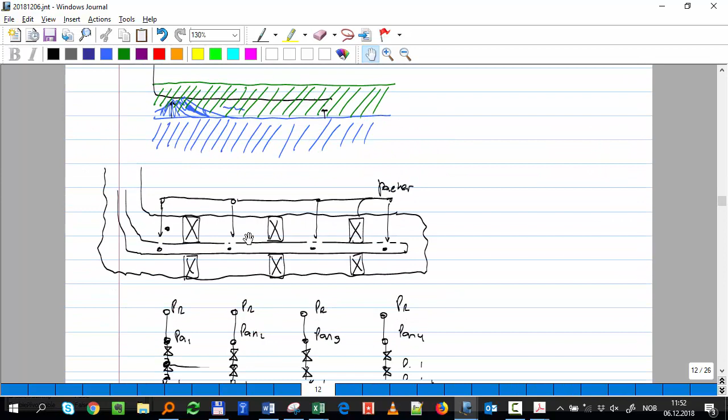Then I made you aware that this network solving philosophy can also be used to solve downhole systems. First injection, but also downhole. Why do we have downhole systems? For all kinds of reasons. Then we solved that exercise in Excel.

Then we went to this topic called reserve estimation. That's something we have to do along the field development process from DG0 to DG3. Initially we have very little information, and afterwards we gain more and more. We talked about how the values are gathered.

How do you gather the volumes? How do you gather the properties of the fluid? We have coring and logging. And at the end, we use—actually maybe here I should put Bo, right?

We use a simple equation to reflect just how uncertain the input can be. We look at data measured from porosity from the field. We had 100 measurements, 50 measurements of porosity in the field from cores. We try to show how that distribution looked like.

From our sample, that's the distribution we obtain using a frequency analysis. That means that 60% of the samples have a porosity of 24%. 12% of our samples have a porosity of 22%. And so forth.

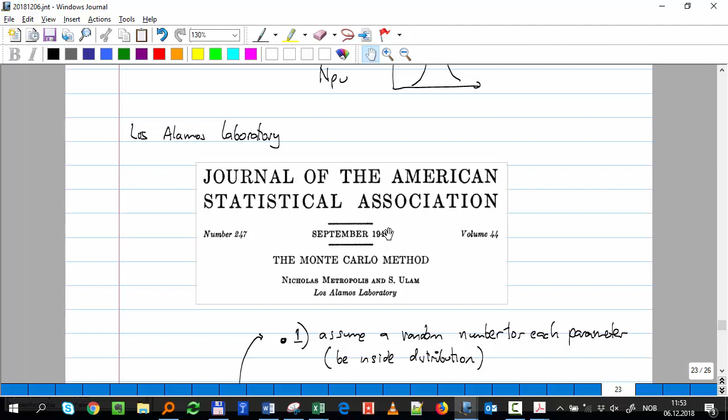Then we came and said, if we have uncertainty in all the input, how do we reflect that uncertainty in the output? There were two very clever guys that developed this method, back in '49, in the 50s, in connection with the development of the atomic bomb. They called it Monte Carlo, and basically it's making a random sampling in the input.

Where do we have the input? The steps are: you assume a random number at the input, it has to be inside the distribution, run the simulation, compute the value, and then repeat many times. The number of times is until the distribution doesn't change much. You do it for 500, 1,000, 6,000, until the distribution you obtain doesn't change much.

And we showed that the distribution you get for that formation looks like that, and from there we can get the three numbers that the authorities need, or that we need to make our calculation.

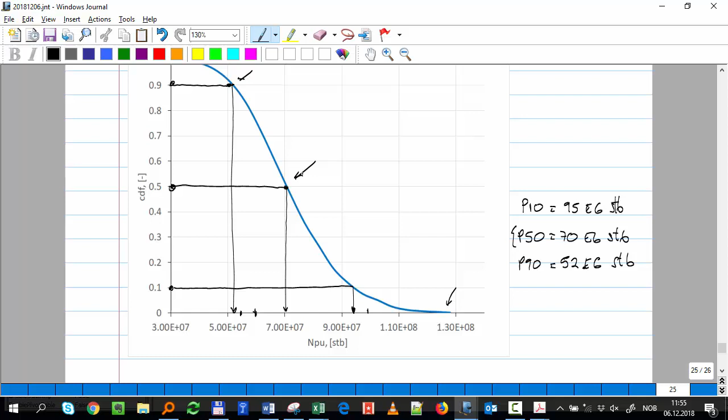Typically, for the calculation we did yesterday, you will use P50. You don't use the most positive or the most negative, but you choose the one in the center, P50. That's how you calculate your profiles. So P50 is usually used for production forecasting, profile forecasting.

So that's all I had to say for today. I suggest you work a bit more, continuing until you reach the same point. Like I said, the plots are not important. What's important is that you understand what the plot is saying and can extract data from it. But you have to make the calculation, you have to generate the numbers.

Tomorrow we're going to talk about how, not in all cases, can we use this approach. This is very heavy. In our case, this function runs like that—we just double click and it calculates all the numbers. In reality, this process takes a lot of time, like calculating the profile.

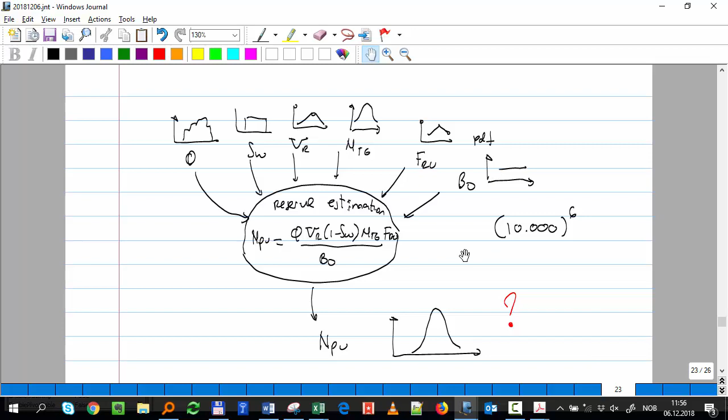We were yesterday like half an hour. If every iteration takes half an hour, you cannot make 1,000 iterations, you cannot make 1,000,000 iterations, in a simple way. So for that sense, we use another method that we're going to discuss tomorrow, called probability trees. That is very much used in the oil industry.

When the simulation takes a long time—that is typical when we calculate production profiles, or for example when we estimate cost estimation, or when we make NPV calculations—simply, Monte Carlo is just non-practical. It will take forever, you will be waiting for a year for the results.

Monte Carlo is impractical, that means too long running times. Therefore, we use probability trees. And that's what we will discuss next class: probability trees. And we are going to go on to the offshore part—how do you select the offshore structure? That's also a big part of the field development.